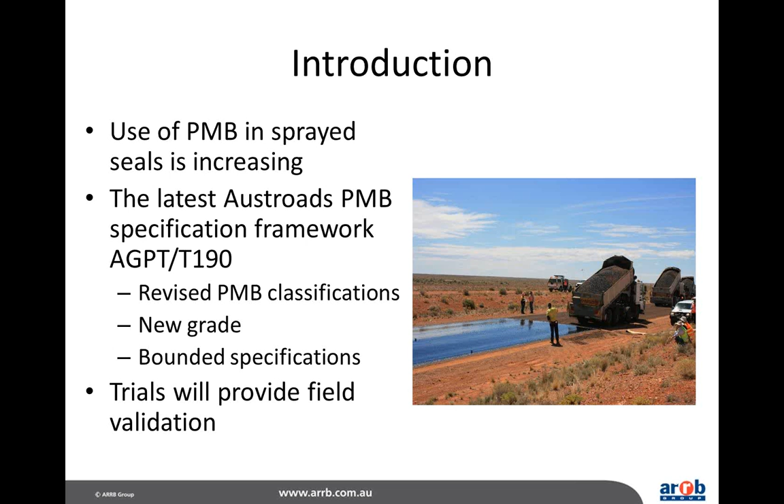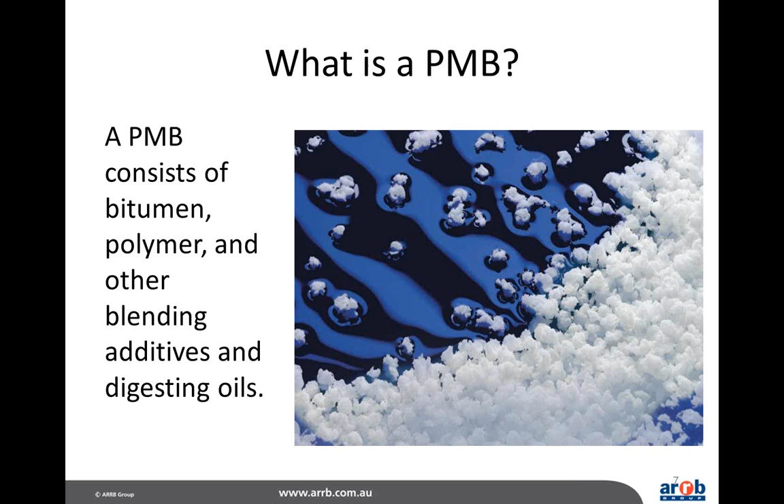Well, maybe not obviously, but they're typically blended up a bit better than you see in that photo when you get to using them in the road, but photo for indicative purposes only at this stage.

Now, the history of T190. It is based on a set of test procedures that have been used in Australia for several years. The intention of the specification is to achieve performance in the field for both spray seal surfacing and asphalt pavement applications that utilise polymer modified binders. The specification limits in the document are currently framed around the results of nationally coordinated field trials and laboratory studies that are supplemented by the Austroads member authority experience.

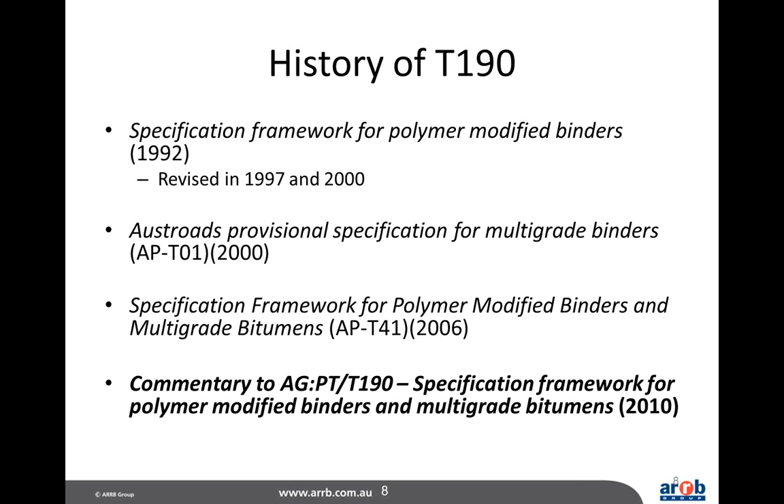Over the years, there have been many changes to what is involved in the PMB specifications. Changes in the PMB grades and the requirements. The multi-grade binders have gone in, and I think now out, and improved point of delivery quality indicators for PMBs. If you wish to look up this document, there's a front page or the commentary page of the specification that gives you a bit more information on the development of this work.

However, for these trials, we have a site out in Coober Pedy, and we successfully hauled a truck full out to Coober Pedy from Sydney, and so that's a fair distance to take. So wherever you are, check with your local suppliers anyway.

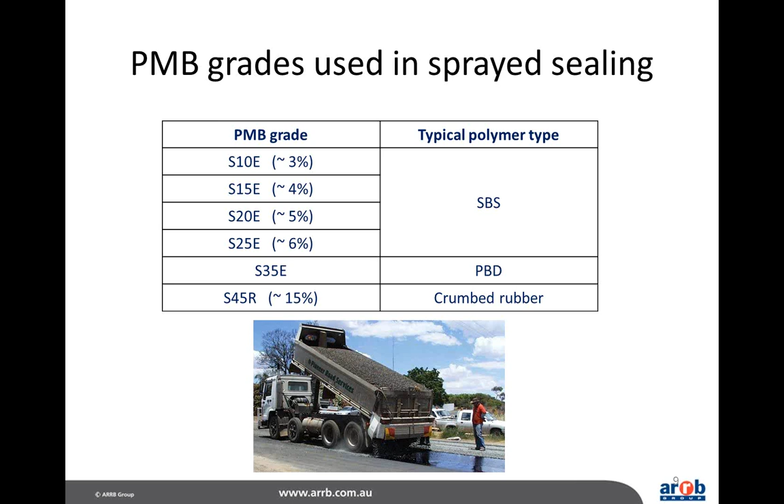So the objectives of these trials, why were we doing them in the first place? The objective was to validate and rank the performance of PMB sprayed seal binders for the different uses and applications. Field validation of the performance of these current generation PMBs will help assist appropriate binder selection and hopefully enable longer seal life and reduced maintenance costs for practitioners.

We were investigating the performance of PMBs at two levels. As a crack inhibitor, determined by crack growth measurement, how good are these PMBs at stopping cracks coming through, and by the quality of the seal, determined by sand patch texture depth and visual assessment of the surface quality.

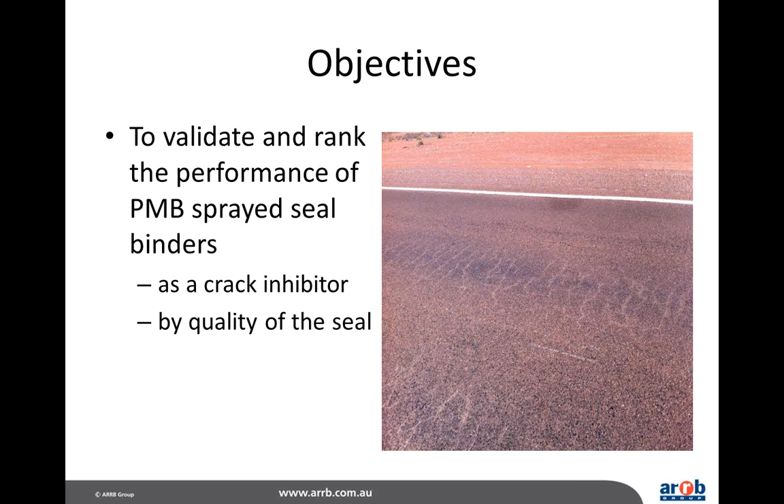Now, where was that photo taken, Steve? That's taken at the Coober Pedy trial site, which I'm about to introduce. So you can see all the red dirt up in the top of the frame, as you find out in the middle of nowhere in Australia, and you can see the heavily cracked surface at the bottom there with a bit of pumping coming through as well. So that's the Stuart Highway, which is what we get to now: site selection and assessment.

There was an Australia-wide search for appropriate locations to stage the PMB sprayed seal trials. All the state road jurisdictions were provided with selection criteria, and were asked to identify potential trial sites within their road network. From these, 2 trial sites were to be selected. The sites were inspected for suitability based on a number of criteria that influence seal behaviour, with the horizontal curvature, how straight your road is, one way to look at it. We were looking for ideally straight and uniform road sections.

The significance of cracking: as I just explained, we were looking at the ability of PMBs to withstand cracks, so the existing cracking on the site was an important factor that we were looking for. Climatic conditions: ultimately we wanted one in a hot and dry type situation, and we also wanted one in a colder, wet location, just testing the PMBs over a greater range of variables. We were looking for different concentrations of traffic, i.e. one heavy and one light.

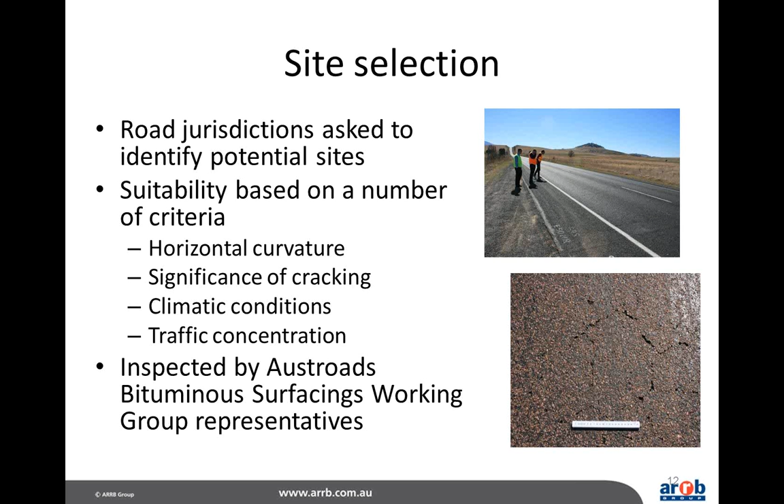And we also looked at practical applications, like were there material stockpile sites available, were we able to get construction vehicles and observers and people doing other work around the site. So the potential sites identified by the jurisdictions were subsequently inspected by an expert group made up of members of the Austroads Bituminous Surfacings Working Group, and they were charged with the responsibility of selecting the 2 best sites appropriate for these trials.

In the end, we ended up with one in Coober Pedy, as you saw in the photo just before. Now, if you don't know, Coober Pedy is practically in the middle of South Australia and almost in the middle of the whole country. The trial site is about 4 kilometres long and is on a 2-lane, 2-way section of the Stuart Highway, approximately 4 kilometres out of Coober Pedy.

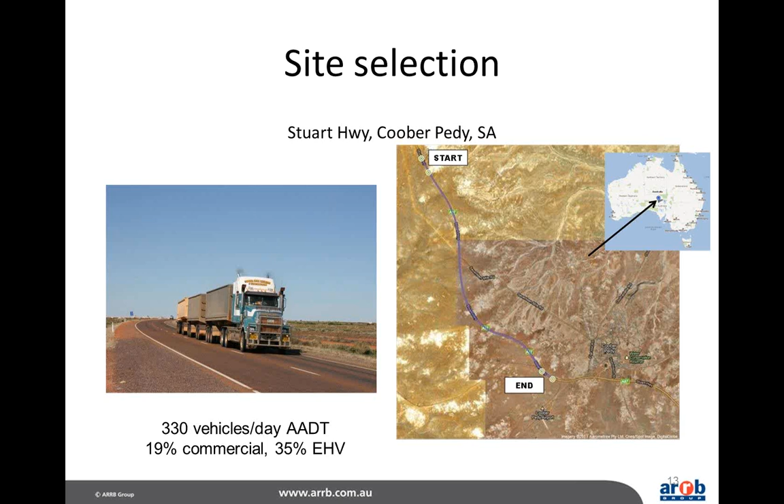This site was chosen for its heavily cracked surface, in most parts crocodile-style cracking, which appears as an area of small segments bounded by cracks, with the appearance of a crocodile skin, most likely caused by fatigue stress of the surface. The site is subject to generally hot, dry climatic conditions and low traffic levels, but with a high proportion of heavy vehicles.

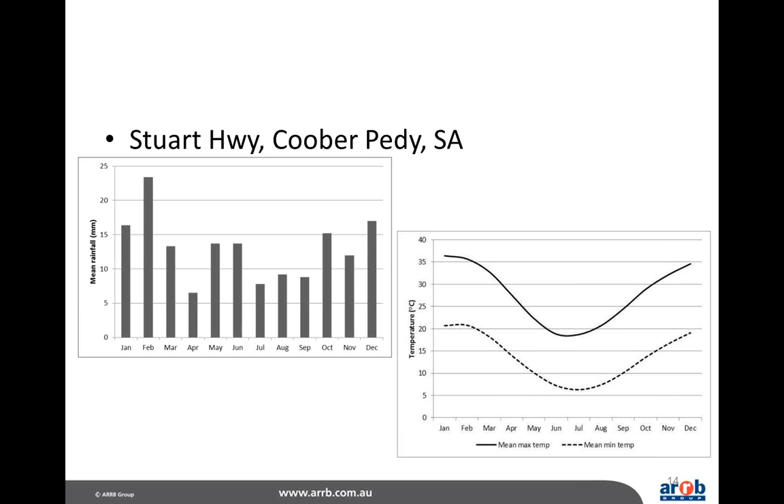As you can see here, I've just got some weather data for the Coober Pedy site. The rainfall on the left with relatively low levels of rainfall, and then the temperature distribution throughout the year on the right. And as you can see, in the summer months, the average temperatures are above 35 degrees Celsius. It is pretty warm out there.

Now the Cooma trial site. Cooma is south of Canberra. Our trial site is on the Monaro Highway there. The site is about halfway between Cooma and Canberra, but we call it the Cooma site. It's about a 2.8 kilometre long section. It's 50 kilometres north of Cooma, 65 kilometres south of Canberra. This was chosen for a cooler climatic condition and its higher traffic count.

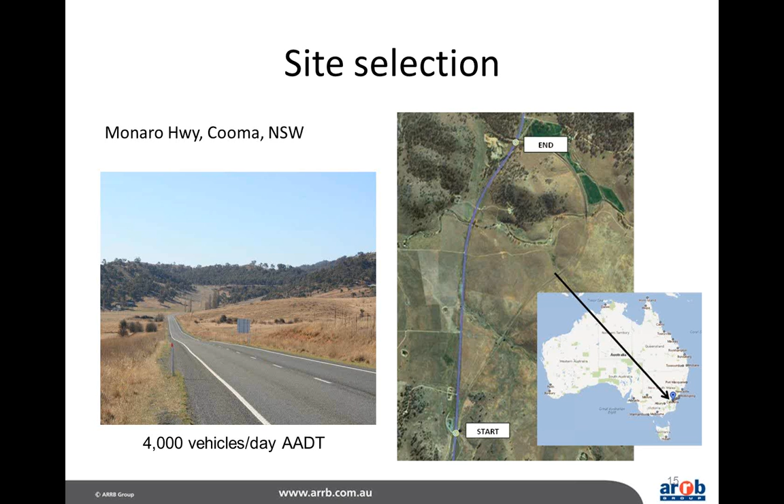The Coober Pedy site was very low traffic but lots of heavy vehicles, whereas this site had a much greater proportion of traffic. It's a far more urban area, and especially in the winter months it gets a lot of traffic down to the New South Wales snowfields, which Cooma is pretty much the gate to. There was also a large amount of cracking at this site, typically in larger blocks, reflecting joins from underlying stabilisation.

So you can see here the rainfall on the left. I've got Cooma and Canberra data in there, just for your interest, but it's a far more significant amount of rainfall in this part of the country and on this site. And you can see far lower average temperatures, much lower in summer, and then in the winter getting down to about 12 degrees in the middle of the year. Just a slight climatic difference there.

Yeah, a little bit. We went and did some inspections for these trials last week, and this was in February, and the first day we went to Cooma and it was 15 degrees, and then the next day we went to Coober Pedy and it was 40 degrees.

Well, that actually sounds a bit like Melbourne. Yeah.

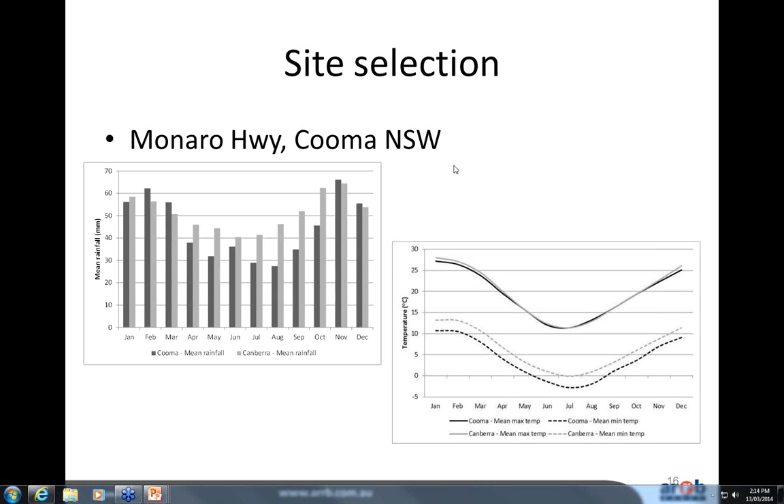Okay, so once we selected the sites, we did a bit more assessment of what was really there, so we were able to judge the ongoing performance of the trial seals. We really needed to collect a lot of information about the existing condition of the road surface. Before we can make judgments about the performance of the new seals, we need to understand what is happening to the road and how this may influence the ongoing performance of the seal.

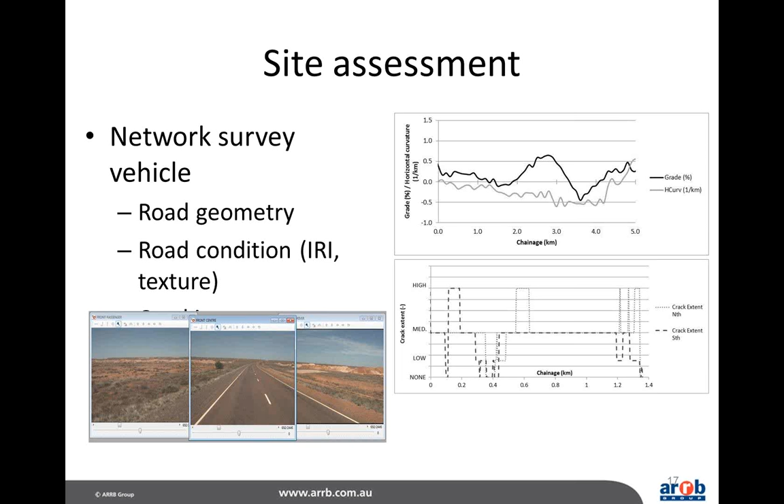As such, surveys of the test sites were conducted prior to the trials, gathering important information that may influence our findings. We used an ARRB network survey vehicle, which recorded road geometry and location data, surface condition properties, and road crack data with digital imaging equipment and laser profilometry. This data was used to finalise detailed planning for the test section locations, which we were able to do from the office, and also provide the basis for comparison for the performance of the trial surfaces throughout their lives.

Additionally, a visual assessment of the site condition was conducted at both trial sites by experienced practitioners: Walter Holtrop, who is formerly of AAPA, and Barry Mulholland, who works for Sprayline, a spray company that operates out of Victoria. They did these inspections immediately before the new surface was laid, further assisting with the identification and understanding of any anomalies that may arise during the trial.

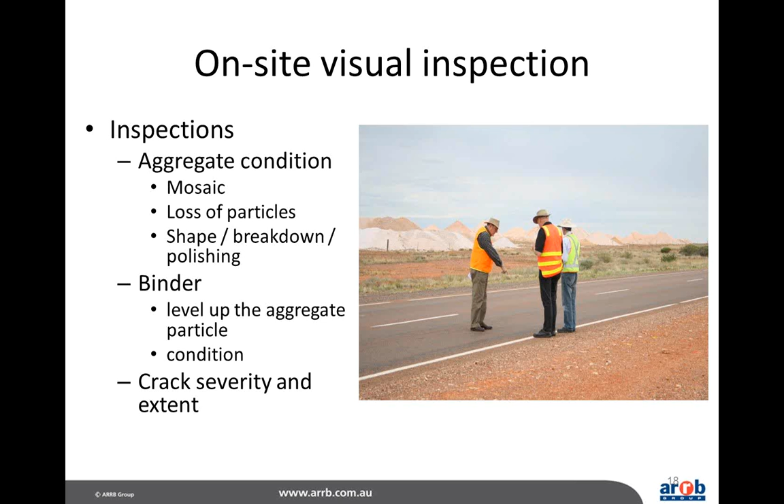The data collected in these inspections included judgments of many of the important indicators of spray seal quality from a more close-up point of view, like the things listed on your screen now: the layout of the aggregate, was there any aggregate loss, binder condition and level of the stone, and cracking, those sort of things.

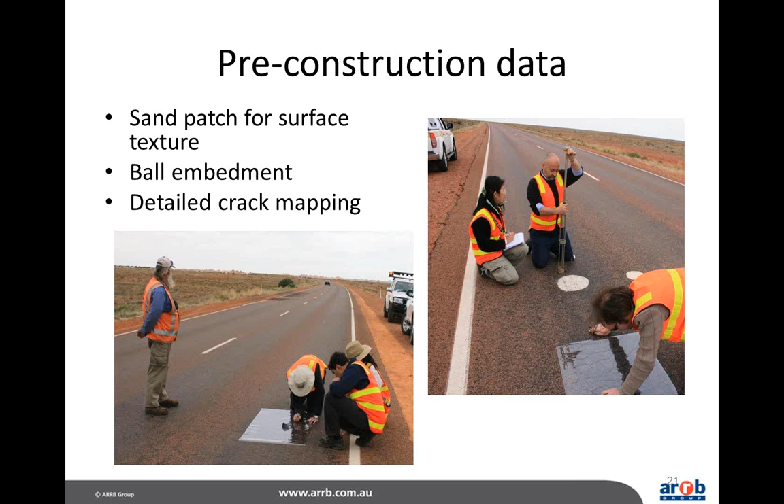So as you can imagine, that was quite a fun task, and so here's an example of two of the crack maps which I drew, and you can imagine they're 1 metre square, so they're quite large.

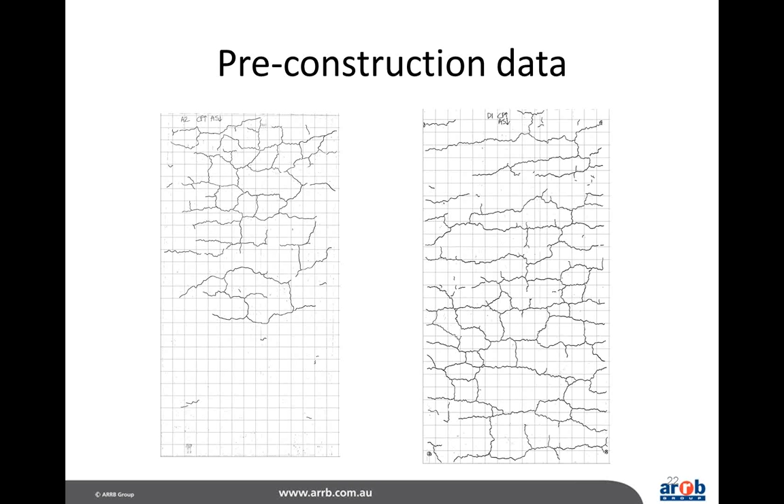They look like interpretive wallpaper or something for a nice modern house. Anyway, moving on. Or maybe you could sell it. Yeah, to some interior designers. Just hinting. You send me an email afterwards, everyone, if you're into some modern art.

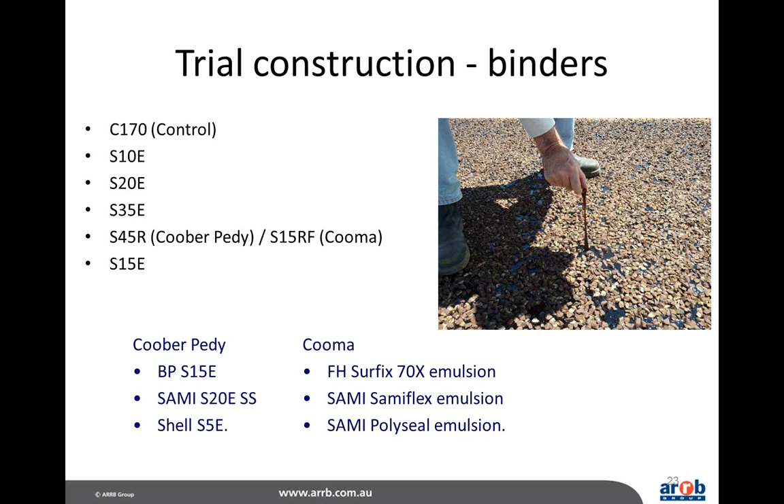In Cooma, we had a bit less space to play with, and each section was only 300 metres long, with 1 lane in each section being utilised for our assessment purposes, as the cracking behaviour was worse in this lane and more suited to our trials.

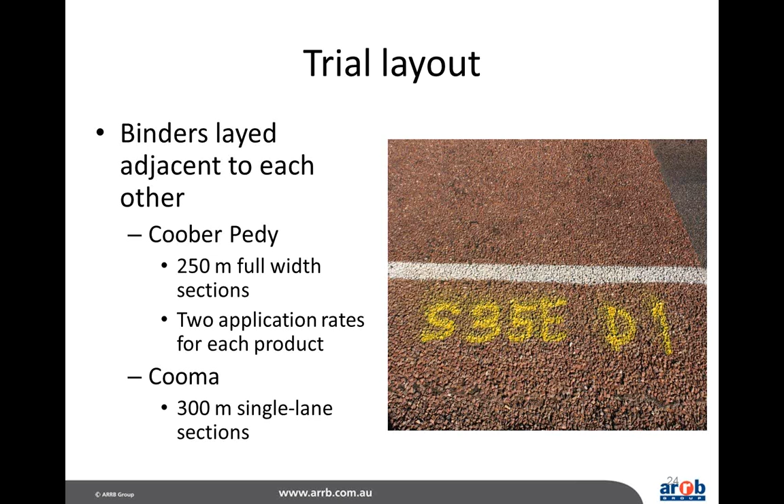So we have a poll question. All right. I might take this, Angela's going to take over. All right, thank you, Steve. Now, for those of you who are new to our webinars and how polls work, I'm going to launch that, and you'll see a blue pop-up box on your screen, and if you could just select your answer choice. The question is, do you take samples from your road building activities? So the answer choices there are yes or no, and I'll leave that open for a few more moments while we get those responses through.

Steve, do you anticipate? Oh, there might be a right or wrong answer, but this is almost more for my interest in introducing the next topic of my chat. But I won't try and sway the answers. I think we have quite a lot of people that are responsible for road building here, so I'll be interested to see what the response is. Absolutely. All righty. Well, I might close the poll there. Thank you to all of you who got your answers through, and I'll share those results.

So, Steve, 68% of people answered yes to that question. So, what does that mean to you? Oh, no, that's good. I'm about to talk about why sampling is good, but especially for purposes of our trials, we'd be completely lost without sampling. Well, let's go to the next poll question.

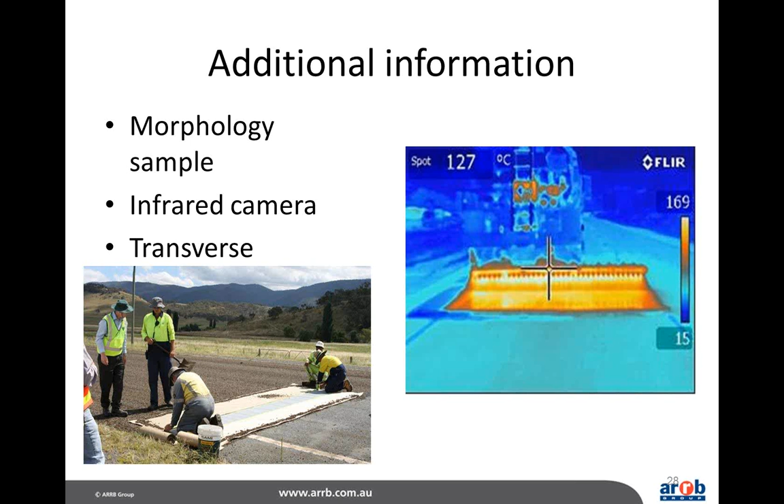An infrared camera was used in an attempt to gather indications of binder spraying details such as transverse binder distribution, blocked nozzles, and spraying temperatures by photographing the start of the spray runs. And also during the Cooma trials, the transverse distribution of the seal applications was measured by RMS technicians. You can see this in the bottom left hand of your screen at the moment. They were using the field mat technique, which is used in the calibration of bitumen sprayers. A carpet strip is placed across the section being sprayed as a continuation of the end paper, and then cut up and weighed to measure the amount and variation of bitumen laid across the width of the road.

Okay, so now we've talked about planning and assessment and construction. We step into the monitoring and outcome phase of the trial. So we are currently in the monitoring stage, and it is also a very important stage. This enables the verification and validation of design procedures and construction techniques. Previous experience with Austroads seal trials has shown that it requires about 2 years trafficking for the road to settle before you can make any sort of preliminary conclusions about the sprayed seal trial. Basically, the road is settling. It's very advantageous to continue long-term monitoring after this to confirm or amend any primary conclusions. We have recently undertaken the 2-year inspections, and we are hoping to secure funding to keep assessing them over the following years, probably at two-year gaps between inspections.

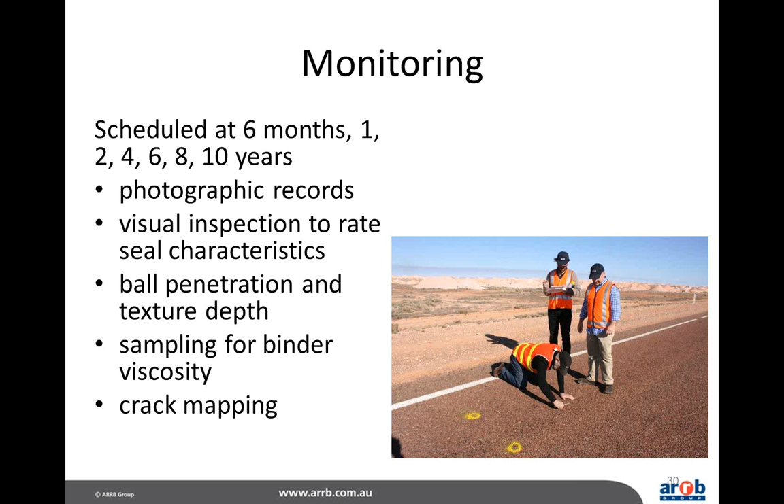Long-term monitoring is quite similar to the initial site monitoring discussed earlier. It consists of photographic records of surface defects and overall condition, visual inspection to rate seal characteristics, ball penetration when appropriate and texture depth, and sampling of the binder to enable measurement of the viscosity of the binder as it ages, and also the crack mapping which I was showing you earlier.

We just had a question, MPD, so that is a mean profile depth. It's a measure of texture depth that is used with laser profilometry. This data was collected by the South Australian Road Authority, actually, with their two-laser profilometer. Thanks for raising that, Thomas. Much appreciated.

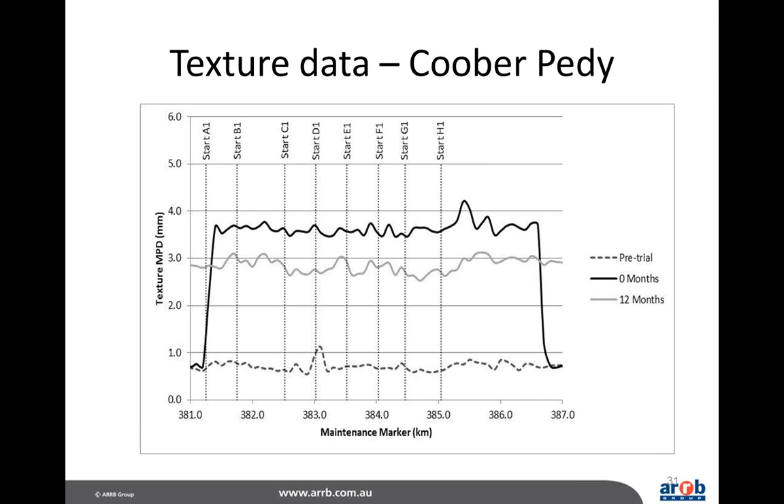There are a couple of points along the length of the road where the texture matches. These are points where there are bridge decks that we didn't reseal as part of the trial, so the texture depth remains the same on them; that's why they are measured the same.

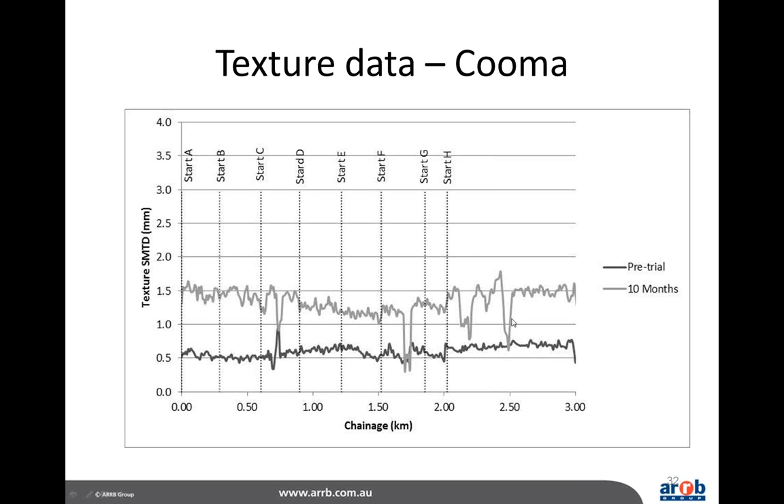Also, I'm about to get to that point, but there's a bit of distress in the form of stripping in the trial in this section at the end of the trial, and so in those areas the stone has been stripped away and the texture is not as good, and that has come up in the survey vehicle survey as well.

Now, stepping into the binder testing results. So this is back in the laboratory; we collected all those samples and put them through this suite of testing. We found that 6 of the 12 specified PMB binders showed, as manufactured or straight out of the factory, test results which met the requirements of either the bitumen standard or the PMB specification T190.

All the as manufactured binders, except the crumb rubber binders, met the storage stability requirements of the European PMB specification, which is very similar to the storage stability in the Austroads requirement. However, it's a bit hardier, a bit more sensitive, so we use that test in the place of the Australian version. A number of the binders actually met asphalt grade PMB requirements.

T190, as I mentioned earlier, has spray seal and asphalt grade PMB requirements, and there's a bit of overlap in them. They're called different things, but certain grades from spray seal are very close to certain grades in asphalt, and vice versa. And so we actually ended up with a couple of PMBs in this trial that met the asphalt grade. Essentially what this will mean is that it'll give us an indication of how asphalt grade PMBs may perform in sprayed seal, so it's quite interesting in itself.

Most of the binders studied did not show a marked difference between as manufactured and as delivered properties, so that's straight out of the factory and before they go into the truck before use. And also these changes in the test properties during transport did not occur for the bitumen samples and PMBs that contained lower amounts of polymer. So it was indicating that with more polymer in there, you might expect a greater difference between as manufactured and as delivered, and far less effect for the lower level modification products.

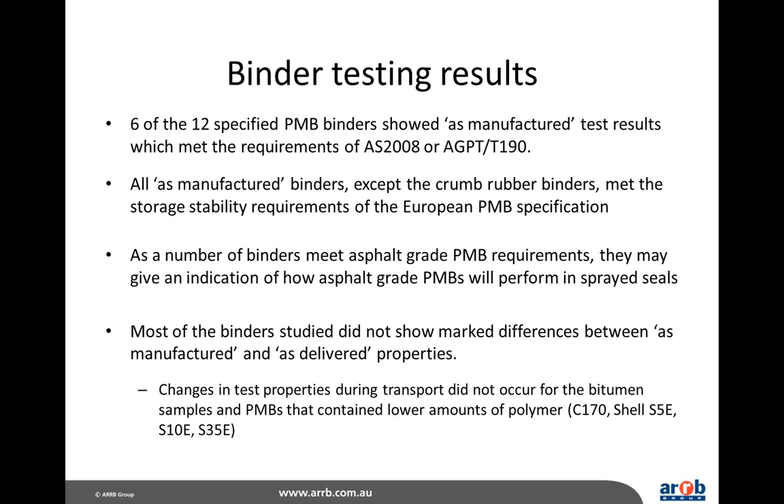The aggregate spread rate was quite variable in this job. We noted it was the first job on a contract for the crew constructing these seals, and perhaps the truck drivers weren't practiced. Basically there was a dramatic improvement as the guys got used to their equipment. So the first couple of seals they laid weren't as good as the ones they laid a couple later on. So that was quite an interesting observation.

The seals are generally quite hungry and highly textured. The binder level at the stone is lower than is desired for this 2 year life stage, indicating that the binder application rates may be too low. Also, we found at this stage the C170 control product and the Shandy product, which was laid adjacent to the trials, are performing just as well as the PMBs.

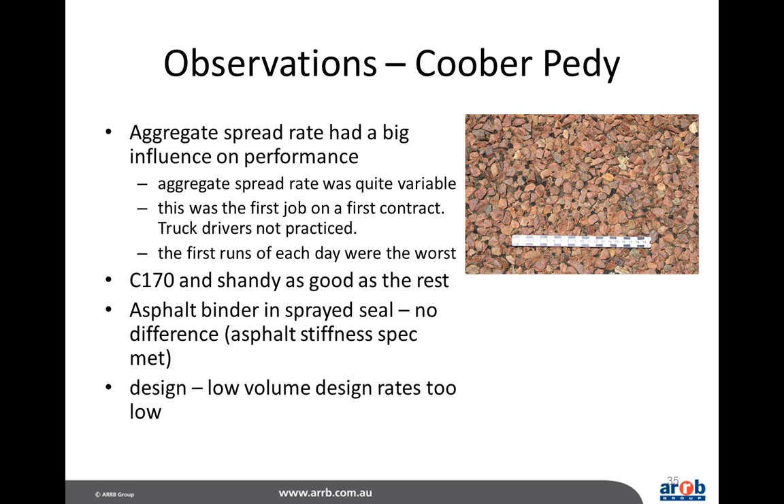These trial seals are performing well in some instances, but several sections have been subject to high levels of stripping and may require maintenance intervention in the near future. Several sections have suffered from stone loss along the centre line and in between wheel paths. The lanes were sprayed separately, and overlap of the sprayers in the centre line we think may have contributed to this stripping.

Recent research has shown that cutter levels in PMBs may need to be increased, and the observed cutter levels may have been too low on the second day of the construction of these trials when temperatures were a bit cooler. Stripping has occurred across all the sections and not just those sections laid on the cooler day, so it's not the only reason, but we think it was a contributing factor.

We used 3 emulsion products on the Cooma site, and the performance of these seals is quite good, amongst the best performing on this site. This may be a result of the enhanced wetting characteristics of the emulsions, basically the initial ability of the stone to stick to the bitumen. These seals are also generally hungry and highly textured, indicating design application rates may be too low.

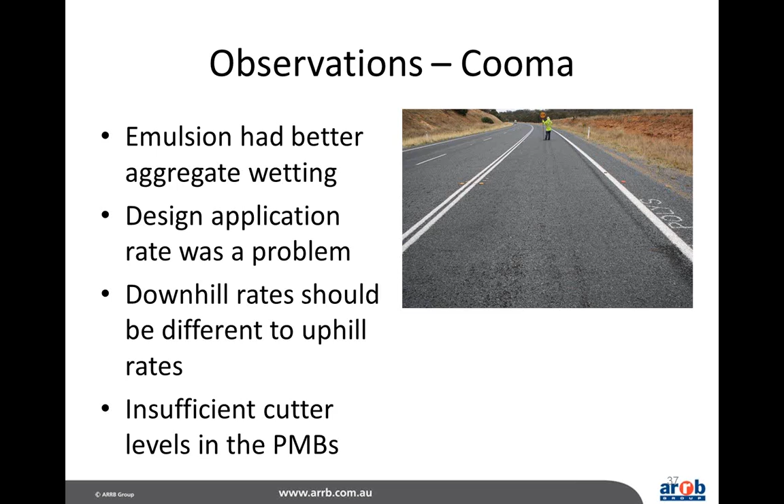Now, conclusions. So, this webinar has discussed details of the trial planning, layout, construction and data on the condition of the trial section before and after the seals were constructed. Field validation of the performance of these current generation PMBs by means of these trials will ensure appropriate binder selection, enabling longer seal life and reduced maintenance costs.

These nationally conducted trials aim to avoid costly duplication of efforts that would otherwise occur by conducting individual trials through industry or various state road jurisdictions. Hopefully it assists introducing improved binders into periodic reseal programs around Australia.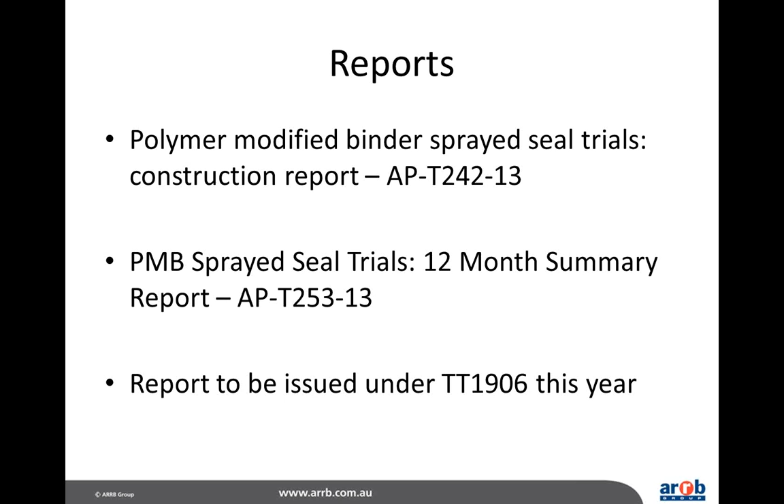Thank you, Angela. Awesome. Well, Steve, we talked a little bit earlier about the conclusions and the outcomes, and Vincent has raised a really good point. He says that all science is based on a simple principle of predict, observe and explain. What did you predict in terms of ranking of performance?

I guess, to some degree, that's handled in the Austroads specifications. And thanks for your question, Vince, by the way. Somewhat handled in the Austroads documents that lay out the specifications of the products, and then also guide you to how they're going to be used. Like products with a lower level of modification might be good for a gentle reseal over not much of a problem area. And then if you were looking to withstand lots of cracks, you might want to pump up the level of polymer modification to give you that little bit of extra strength.

So I guess it's really where we're testing the guidelines that are already existing in the Austroads guides, and basically checking on them and making sure previous assessments were valid and whether we can improve on them or put any more information in them that might help.